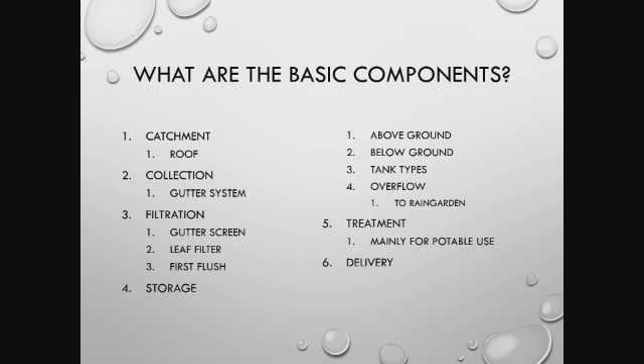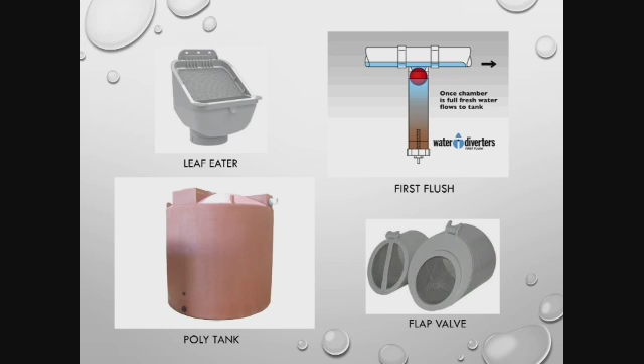There's your leaf eater, your poly tank, first flush system that has this nice little ball that floats up and stops the flow through, which I don't think is extremely critical. But then these flap valves, which you can put at any of your downspouts. Nice part about them is, once again, they keep insects and other critters out of your system.

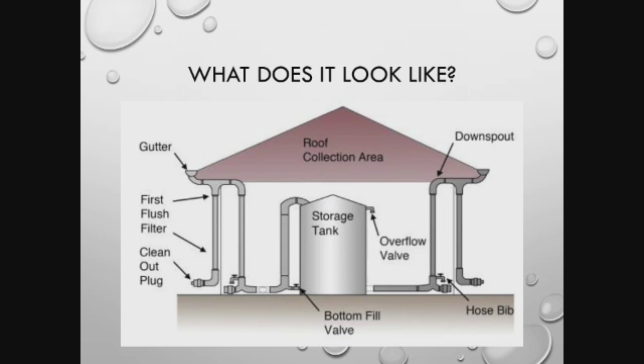This is what your system is going to look like. Given my time, take a good look at that.

Calculations: you're going to want to figure out your supply. Key point, how much water can you get? So you're not looking at surface area of your roof, you're looking at your plan view footprint of the roof. It doesn't matter what the slope is on your roof. The area which the rain is going to fall is always going to be the same.

And then look at your demand. Primarily, I'm focused on outdoor demand. So if you're going to use it for irrigation, car washing, filling up the pool, all these things, those are your water demand. And then your indoor stuff, you can worry about that.

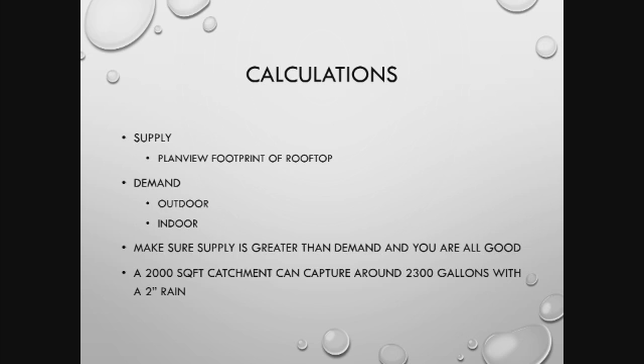Make sure your supply is greater than demand, or else your system is just not going to be what you wanted it to be. And to give you an idea of how much water we're talking, on a 2,000 square foot pad or catchment area, a 2-inch rain, which is pretty big rain, I think 95th percentile storm events are 2 inches or below, will give you 2,300 gallons of rain.

So a leaky cistern is one that is designed to draw down immediately upon the rain tank filling. It can be passive or automated, so you can have a pump on it, or like the ones that I'm trying to design for these public facilities, it's going to be passive. It'll be done through underground infiltration, or you can have a very slow release surface.

If you have a drainage path that is soil, garden, whatever, the infiltration rate you've got worked out, you can figure out at what rate you need to drain this tank, that it will continue to go out, but also drain down so that you don't have what they refer to as nuisance water, which is any water that stands for more than 48 to 72 hours and can be a problem for mosquito breeding. And then the size and method that you use can be based on your infiltration rates of the soil.

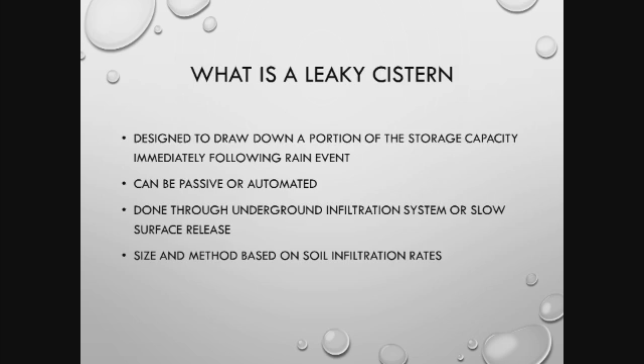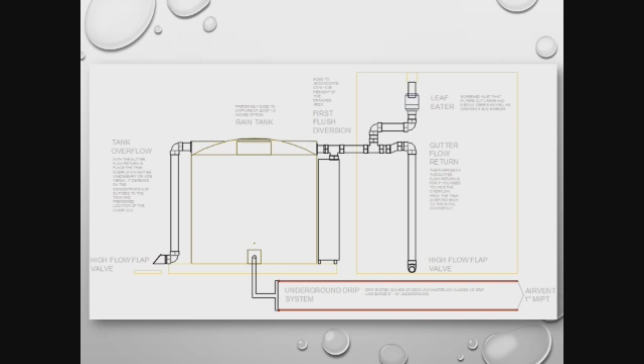And I have this system set up because one of the concerns at the independent school district was if I bring a lot of downspouts to one tank, and then the tank fills up, all of my overflow from multiple downspouts is coming out of one point, which means an increased flow, increased erosion, increased problems from that. So I set this system up to have, when the tank fills up, it drains out another spot.

Here's an example of a bi-speed drawdown. So I don't know how well you can see that, but off the tank, I have a pipe coming up. Within that pipe, I have multiple valves.

If I say, okay, I have X amount of need of rainwater for all these varieties of things, but I'm willing to give a certain amount towards this water quality effort, or the deep watering of your landscape, your trees, your yard, you can set a valve at that point to which you have a drawdown that draws down until it hits that valve level. And then after that, you have another valve below, which is your other uses. So you can always maintain a supply in there and do these passive or immediate drawdown systems.

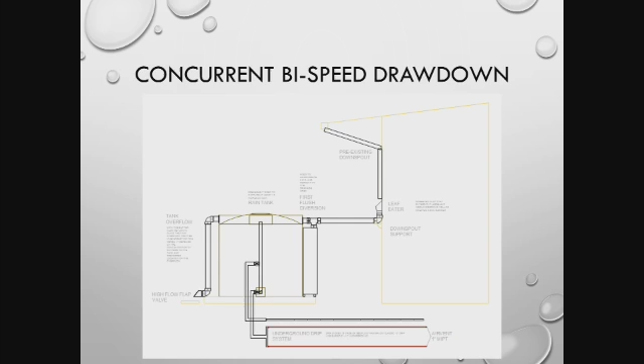Benefits of these leaky systems, some I've covered, but they reduce stormwater runoff, so less erosion, flooding, and deep watering for your vegetation. For people who have slabs, a lot of those folks who are on clay soils and didn't have a good slab poured have to maintain a certain moisture level around the house so that their slab doesn't crack. This is a great use of this system.

On that dual speed system, the first half can drain out quickly so that it's ready to receive the next rain, and that's the key reason for trying to get that tank empty as quick as possible or partially empty. And then have the second system, a much slower drip system, so that you have much more long-term deep water infiltration. And it's adding to the groundwater.

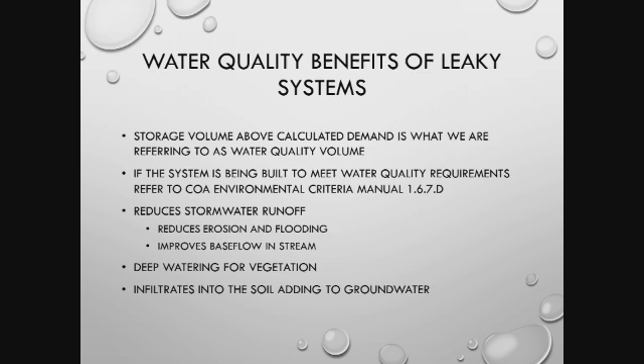If you're doing this to meet some water quality requirements, then you can refer to the City of Austin's Environmental Criteria Manual 1.6.7D. I have all these references at the end. I think it'll be online as well, so you don't have to write that down real quick. Problems and solutions. What's my time? I'm done.

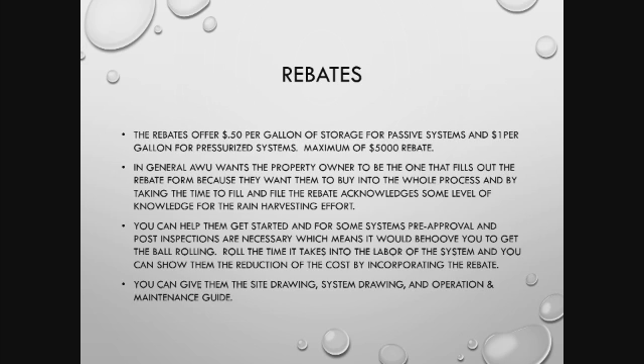Anybody have any questions or want to refute anything I've said? Or I'm always up for any sort of discussion. Nope. All right. Well, thank you for having me.